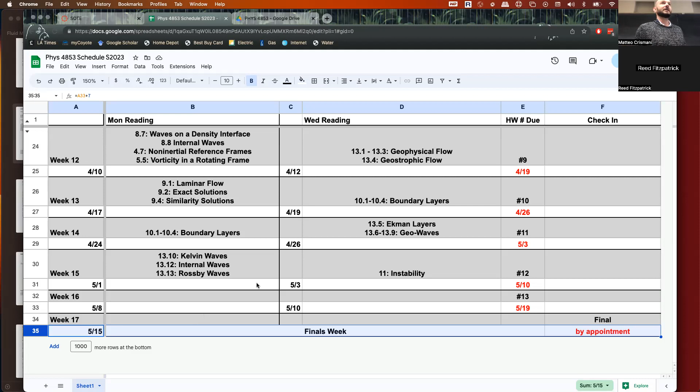And then of course, failing to make a final appointment would obviously also fail the class, if that wasn't clear. Some people waited a really long time and they're not here either. Okay, ready? Question before we start? All right. Didn't mean to get you down so early in the morning.

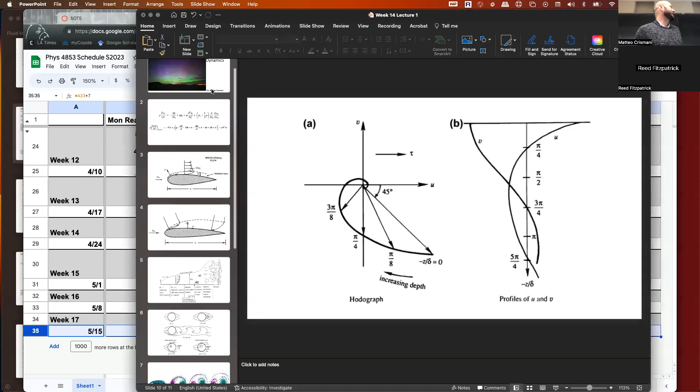Okay, so let's talk about fluid dynamics. This isn't a picture of fluid dynamics, but it is pretty cool. This is two things that happened this week. I think this is in Iowa, which is pretty low, but this is aurora and a meteor happening at the same time. So you had a storm from the sun that's shooting particles into the top of our atmosphere. Pretty cool. It's a palate cleanser, as we say. So are there just cameras always taking things everywhere, or does someone see that? These are human beings. Someone on Twitter posts it, and then I steal it and use it for my classroom. Makes sense? Okay.

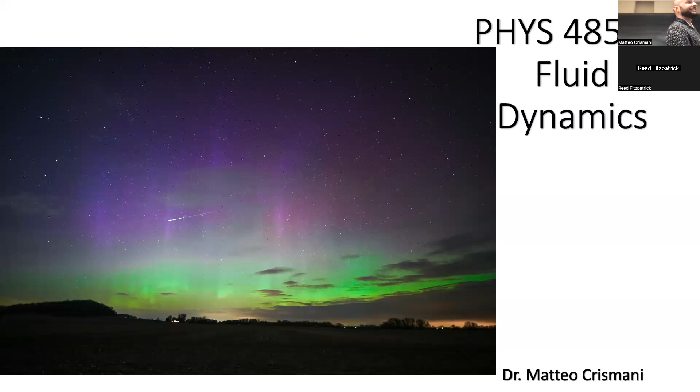Oh no, this one still? Can we do this one? We understand all the terms, right? The first one? What's that? Yeah. And what does it describe? The conservation of momentum. Good. And let's say you're talking to Desiree, how would you describe it to her? Just the overall thing, not term by term. What would you say? You're having a conversation now. You're ready for the final interrogation.

I would say conservation of momentum is basically like, you can't have a moving car stop by itself. The energy has to go somewhere. Uh-huh. So it has to be transferred in some way, whether that be through pressure, through gravity. I don't know how to describe the other ones. That's pretty good, right? That's very conversational. That's the type of understanding that we want to have. Okay. How would you help him, Rolando?

I would say, don't forget that fluids are viscous. One natural property of fluids is that when fluids move, sometimes they undergo stress and strain, and those last two equations follow the stress and strains of the fluid. Okay, and we don't even have to reference the equations, right? Now we intellectually understand these are the causes for generating momentum. Now you've tag teamed really well. And Jose jumps in, he's like, actually, that's great, but you're forgetting about a set of terms that are really important when you think about, say, the Earth as a whole. What would that be, Jose?

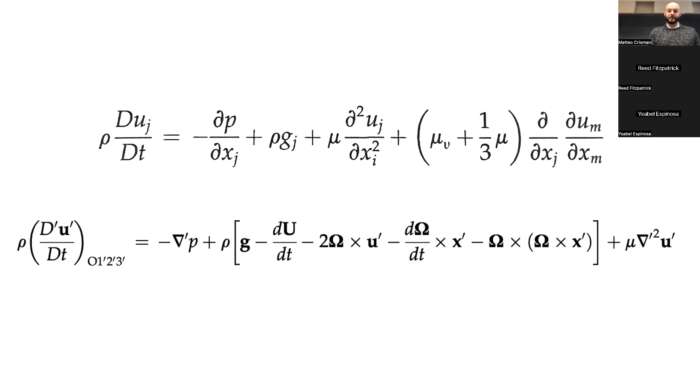This is gonna drive me insane. Someone in the chat that is talking. Okay, let's find out. There we go. There we go.

Okay. So let's work this out. I asked you to find some important scale sizes. Where did I just put them? We wanted to look at the contributions from each of these terms. And I said, how big is this term? Remember? We're gonna get there in 2 seconds. Yeah, there's an L in there for sure, right? What else? U squared, very good, right? So this is like the way that we looked at the dimensionality. We said U infinity squared over L, that's like the size of the effective term. And then what about this term over here? How big is this term?

Okay, so I got a U infinity, good. And it is a length, sure, but how many lengths? Two lengths, good. Anything else? Yeah, it's a nu, but yeah.

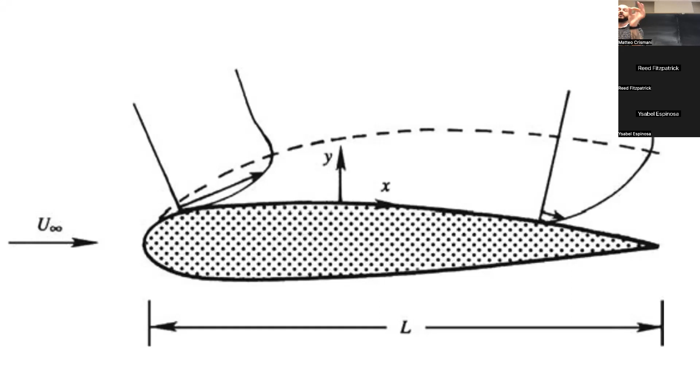And in practice, the boundary layer for something like a 2-meter size wing is how big? Just like a centimeter, right? Those are the numbers that we keep in our head. Boundary layers are thin and they're small for laminar flow. And as we'll see, it gets more complicated as we begin to turn that crank. This is one version of the formalism that can be done exactly. But as I mentioned earlier, almost all fluids problems can't be done exactly. They need computers. So here's a version.

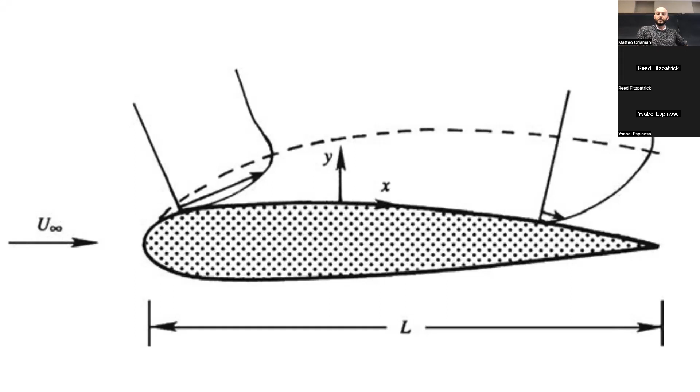Why? I'm going to destroy this computer. Okay, this is a wonderful figure in the textbook, which shows that I'm not the worst artist, because of the scribbles on the side. This is the textbook. This is not me drawing on top of it.

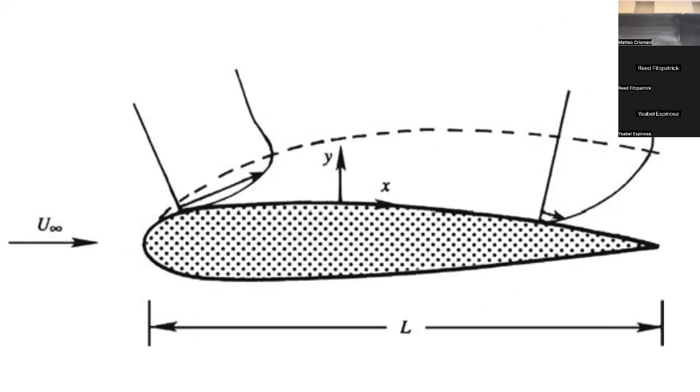So if, for example, we went backwards and we looked at this picture, here the flow goes to U infinity, goes over the wing, and then what does it do afterwards? Goes back to normal, right? That's an assumption of the flow. So that would be a version of laminar flow, one where it acts like layers that are separating around this wing and then converging back together.

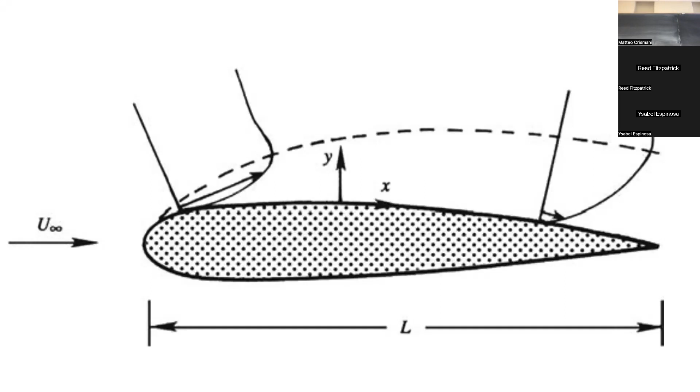And the reason that it does that is because we made an approximation very close to the wing where we said totally different rules are going to apply here. I'm going to treat this separately, and then I'm going to connect the solutions. This is a great way to do physics. Out here, undisturbed. Here, special. And then just smoothly connect these two physical regimes. This happens all the time in real physics. Doesn't happen in like throwing a ball, but you get it.

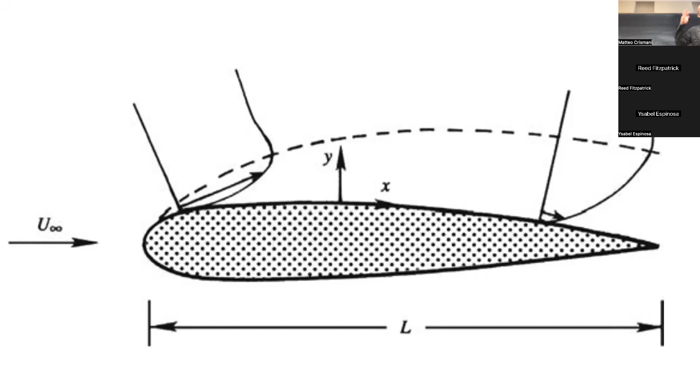Oh my God. I'm going to delete this. How do I delete? Okay, here we go.

So here's that example. No slip boundary condition. We get far enough away. You still have a thickness here. Then you start getting up here to this idea of a region where you have self-similarity, but now you've sort of forgotten the initial condition. And at some point, the Reynolds number gets large enough that you get non-laminar flow for the first time. And this is that transition region between when we think of flow as living in these layers to now them breaking up. And that breaking up tends to have little eddies and vortices associated with it. And as we're going to see in a few seconds, this becomes a highly unstable type flow.

And then, so here you have wiggles. And they're like chaotic wiggles, but notice that they're still bounded. So there's an important definition when we think about the idea of chaos. If you drop a ball, you can predict where it goes, right? So you give an initial condition, and then if I slightly change the initial conditions, you could say how different will the end trajectory be. So if I throw you the ball like this versus if I throw it slightly lower, it's going to end up very close, right?

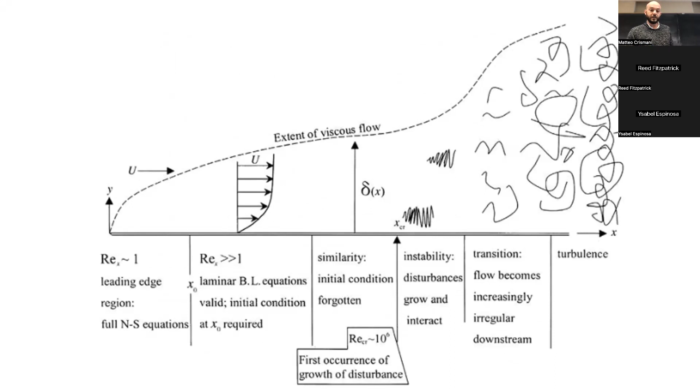You have some instability here and it's bounded, not running away to wherever. Gonna be either on one side of these vortices or not, right? They're close, but they're not perfect. As opposed to here, right? Start up here, small undulations. And then here in this larger Reynolds number, you get turbulent wake. And that's just the scribbling that we saw before, right?

We talked about how when we were writing the fluid equations, we included the fact that there's entropic processes, right? Ones that show the directionality of time. So for example, entropy increases in a system. More chaos. This one, you can play backwards and forwards. There's no viscous property which is creating a directionality. This one, not so much. Right?

This one here certainly has a specifically one-sided time. And then by the time you get to here, you have a turbulent boundary layer, which is something we're definitely not going to get into in this class. A boundary layer itself has vortices in it. Okay. So what does this really look like?

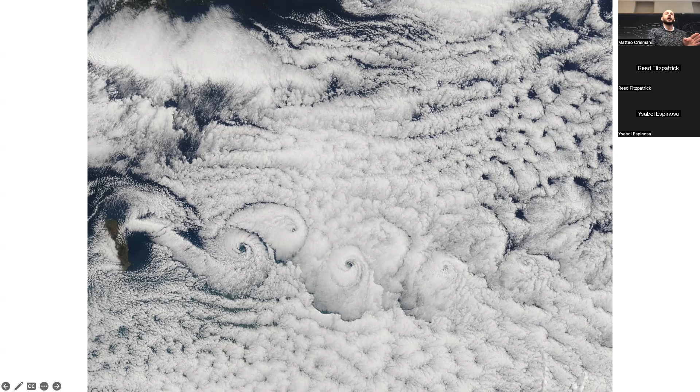Yeah, we're not considering that here. We're just imagining they're already at speed. This is generally true even at speed. So 80, 90 miles an hour would still be true. So thinking about driving a car, I think above like 65 to 70 you're getting dramatic decreases in your fuel efficiency. Yeah. The faster you go in every car, down your mileage goes.

So like planes that fly above Mach 1, are they technically laminar? Okay, interesting question, because now we're getting into two different discussions, one about shocks and one about planes and describing Mach speed. So Mach speed was one of the first dimensionless numbers we talked about. What did Mach speed mean, since you brought it up? What? Speed of sound. Where? On the bottom, good. The velocity on top, good.

Okay, so this is the most straightforward one that we can think about, right? Because this thing here is the speed of the plane compared to the local sound speed. What does the local sound speed depend on? Right, another way of saying that, what physical properties does it depend on? Density. Temperature, good. Okay, these are the properties of the fluid that describe how well it can propagate waves.

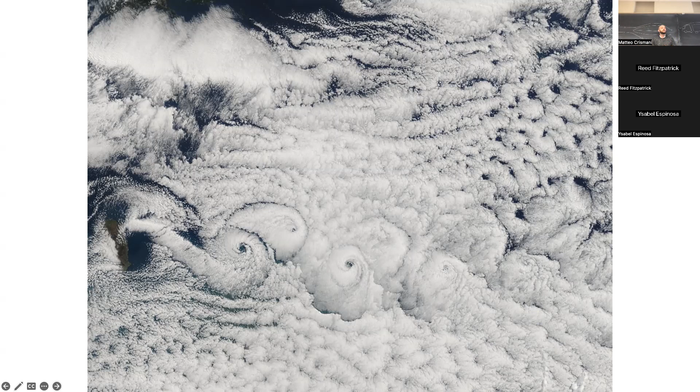So let's say you're traveling at Mach 1. Okay, you need to make sure first that that's not described for the ground, right? Because the sound speed might change very dramatically at high altitude. Okay. So once we've gotten past that little difference in nomenclature, if you're traveling near the sound speed, even 70% of the sound speed, you will become shocked. And what that essentially means is, as we saw before here, maybe I'll do this one. This one is a better example.

Okay, on this side, we can think about streamlines, and we can think about flow coming from far away, going around an object and coming back. You can also think about this as communicating the fact that there is something here by the presence of these lines. This does not happen in a shock. In a shock, it has no idea that this thing is coming, and it simply looks like normal streamlines and then a thing, and then like turbulence behind it. So no, very much not laminar.

But if you like shocks, maybe we'll do that instead of instabilities. What instability? Instability is like why does water boil? Oh, okay. Versus like why plane go bing. It's more important, we're gonna be putting water boiling. But we can also do why plane go, right?

Okay, so let's put these ones up here. This is the one we didn't talk about. I guess there's two we didn't talk about here. Oh, this one's great. Major League Baseball. Paolo knows. Big baseball fan, Paolo. Oh, yeah. So a typical pitch in the major league. Pastime.

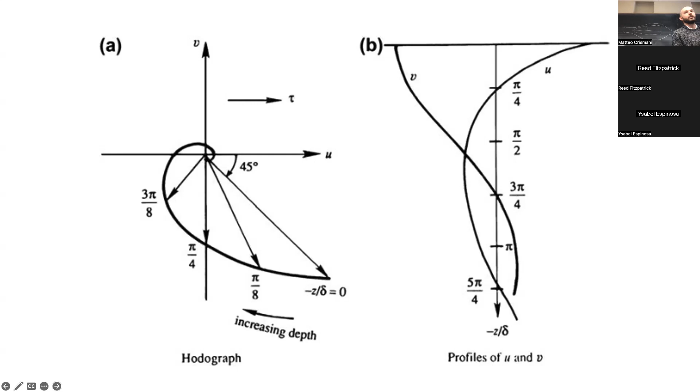What's happening here is we're looking at a free surface interface and thinking about the boundary condition where I blow on the water with wind in one direction over a large scale. How does that velocity propagate downwards? Now that we understand viscous boundary layers, we'll introduce the idea of a viscous boundary layer and the Coriolis effect, and we'll see there's a balance there that's possible. So we'll talk about Ekman layers very briefly, and other types of waves. To prepare for Wednesday's class, get into chapter 13 a little more and make sure you understand the chapter 10 stuff.